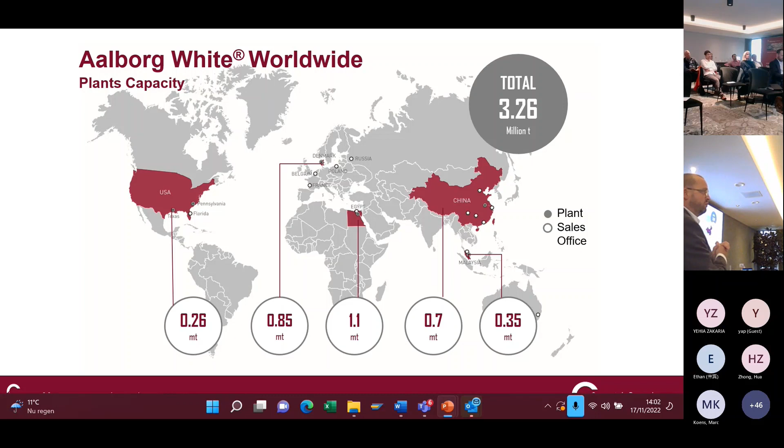And that is, of course, about the raw materials that are used. So first, a little explanation of who we are and what we do. Aalborg Portland, we have 5 cement plants all over the world, in the US, Denmark, Egypt, China and Malaysia, with a capacity of over 3 million tons of cement. 3 million tons of cement looks big, but if you compare it to grey cement production we are only peanuts - on a world scale we are, with these numbers, only 1% or less of total cement production worldwide. But for white cement, we are world leader in production and distribution.

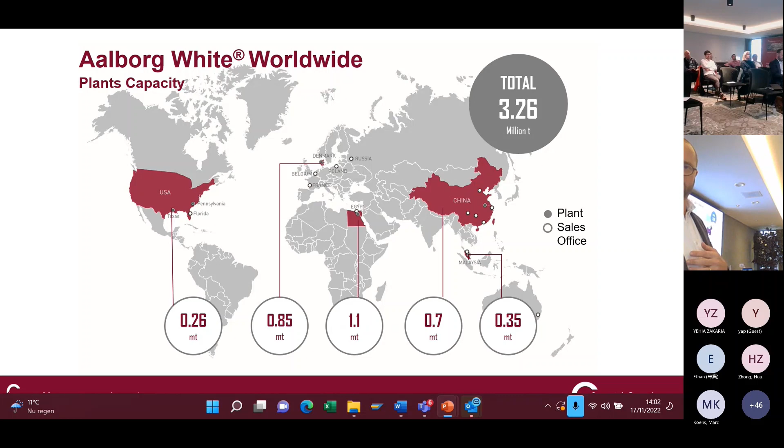We have a history of 125 years. This is in our plant in Denmark, in Aalborg, where we have this long history. But from Denmark we distribute our cement all over the world, present in more than 70 countries. Important for us is also not only to sell the product as white cement, but also to give technical support and customer support so customers can have value added to their activity. We try also to go into development for new applications, and this whole stream of UHPC in white products is helping us with that. Aalborg Portland is also part of an Italian group, Cementir Holding, which has operations in 17 countries and more than 3,000 employees.

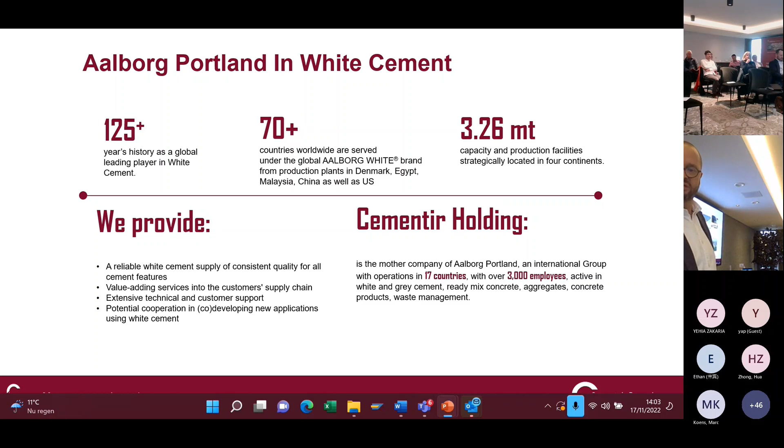Starting from white cement, we can give some segments of the application of white cement. Of course, white cement is always very important for aesthetical products - for facades, precast facade elements. It is also used in paving blocks and infrastructure works, and artificial stone, which is also more for cladding of facades. In Asia we have a lot of GRC, and in Europe we are also progressing in these techniques and projects - GRC standing for glass fiber reinforced concrete. And then UHPC, which is what we're talking about today, is precast elements with high strength. The dry mix mortars are for us also an important segment - all kinds of mortars, repair mortars, tile adhesives, skim coats are also based on white cement. Last but not least, for in-situ projects white cement is often used, like in these projects in Asia.

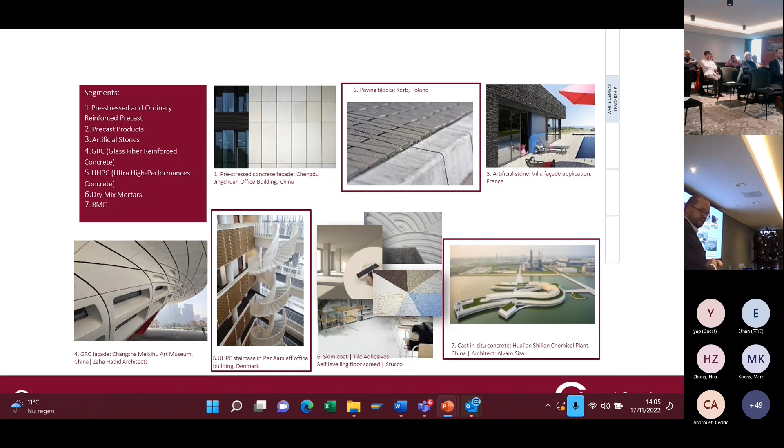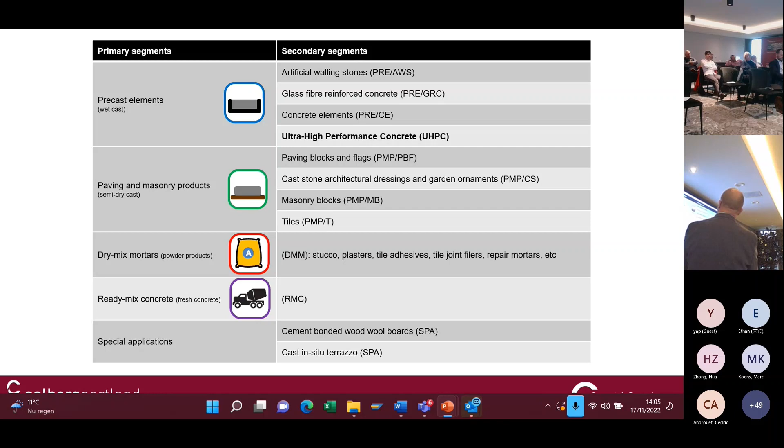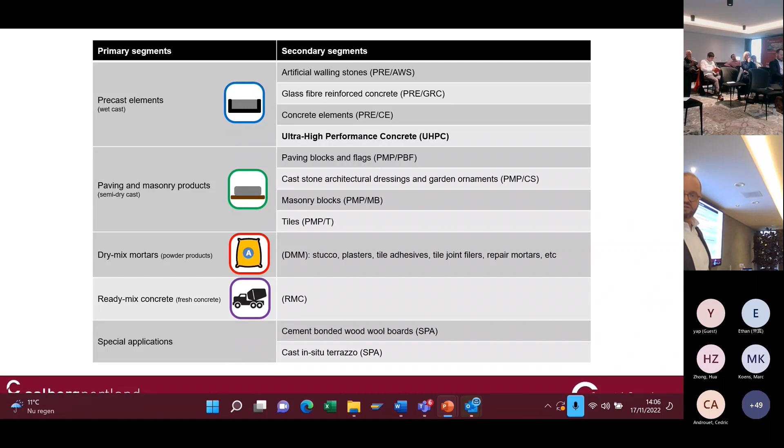So just to position where ultra high performance is situated in the whole concrete industry, we have the primary segments: precast, wet cast. We have paving and masonry products, which we call semi-dry cast, and then dry mix mortars, ready mix concrete, and special applications. Of course for ultra high performance we are talking about a high-end industrial product. It's important to have good conditions to guarantee the quality. So UHPC until today is, for 99%, made in precast conditions with high quality standards, also because of the aesthetical effects and the aesthetical result we want to achieve - it's in precast that most of this production is made.

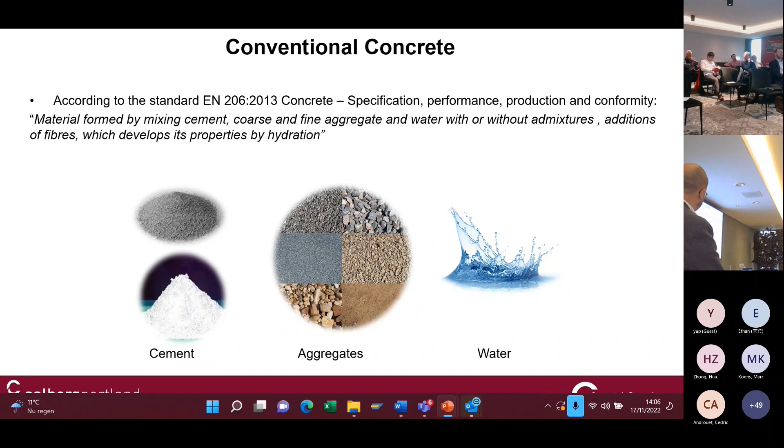Starting from conventional concrete, known by everybody - cement plus aggregates, sand and water - we can achieve different strength classes. The European standard only goes up to strength class C100/115, meaning 100 Newton per square millimeter for cylinder strength and 115 for cube strength.

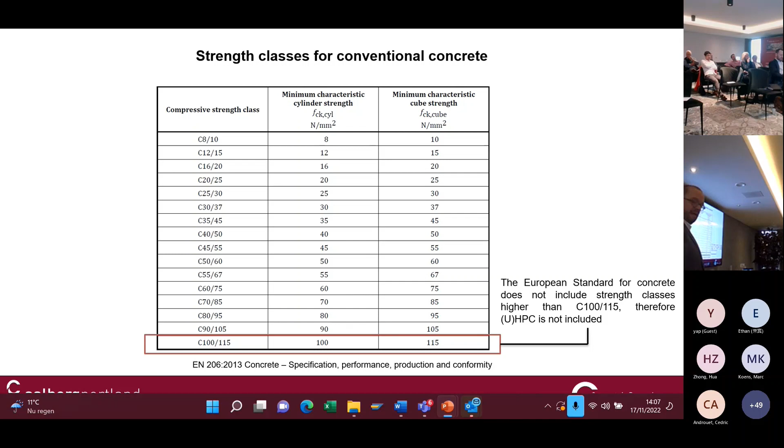This is a limit that has been passed since the development of high performance and ultra high performance concrete. The guidelines for the higher strength classes are still in evolution and still in negotiation.

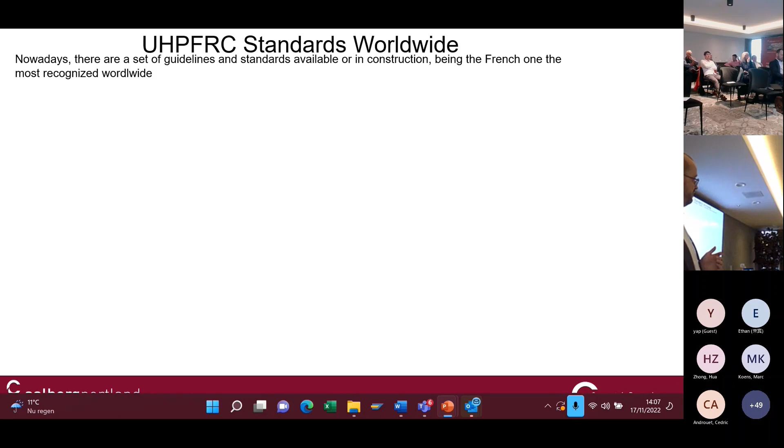In France there is already a very good guideline available, a standard where specifications about performance and production are already described. You can consult this document, which is the most recognized one worldwide.

In Germany there is still a guideline for UHPC in progress. In Switzerland we already have a good recommendation, as told by Peter. Switzerland is also very active in UHPC, but more in the field of overlays, road and bridge repairs. More recently in the US and China, a lot of new standards are being developed, also for GRC and UHPC.

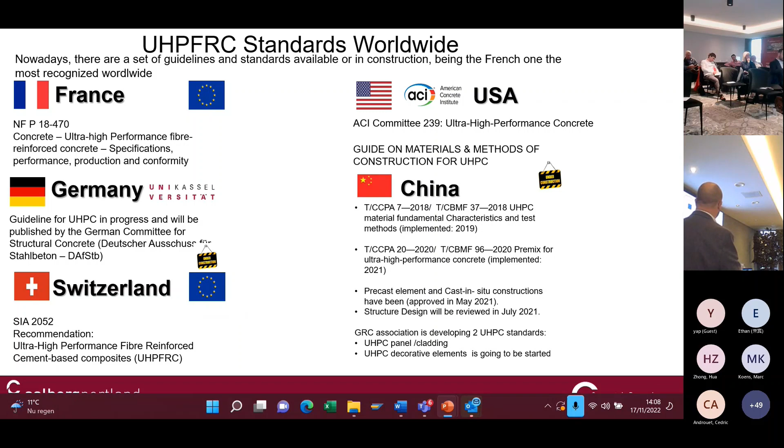I will not go too much into detail on these standards, but if you need more info there exists some literature, and we can help you find the right way through the standards.

To talk about UHPC, we start with traditional UHPC, because after that I would like to take the step to the new generation of UHPC - but first, the traditional UHPC as it exists today.

The important parameters are the water-binder ratio, very low, between 0.15 and 0.25. We're also talking about a high amount of silica fume, around 20% by weight of cement. These kinds of mixes are characterized by a high packing density.

This high packing density is important to achieve high compressive strengths between 110 and 150 MPa, even higher. Also high ductility and durability are important.

The microstructure is so dense that there's almost no way for external liquids or other products to penetrate this matrix, because it is very dense.

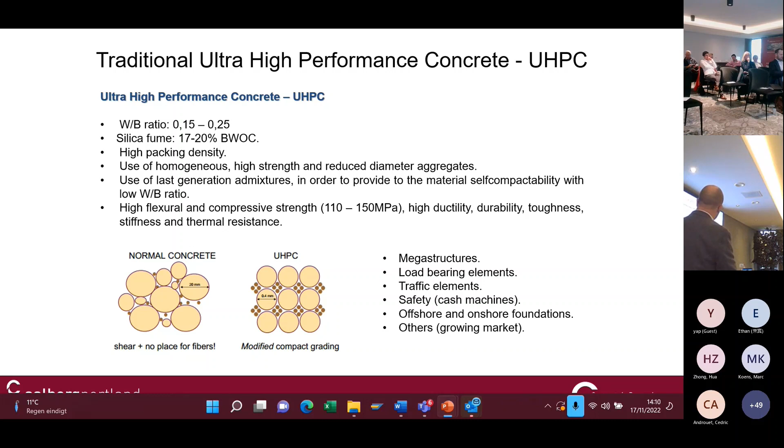So we're still in traditional UHPC - three components: the binder, which we have in very high contents, sometimes more than 50% in weight of the product, and in traditional binders superplasticizers are often included.

Next to the binder we have the aggregates - in most cases we're working with fine fractions between 0.5 and 2 millimeters. Then, depending on the application, fibers are added - steel fibers, glass fibers, PP or PVA fibers - meant to give the material residual post-cracking strength.

That means once you have a crack, or divided cracks, in the concrete, the fibers can provide residual post-cracking strength and take up even higher flexural strengths than the original concrete material.

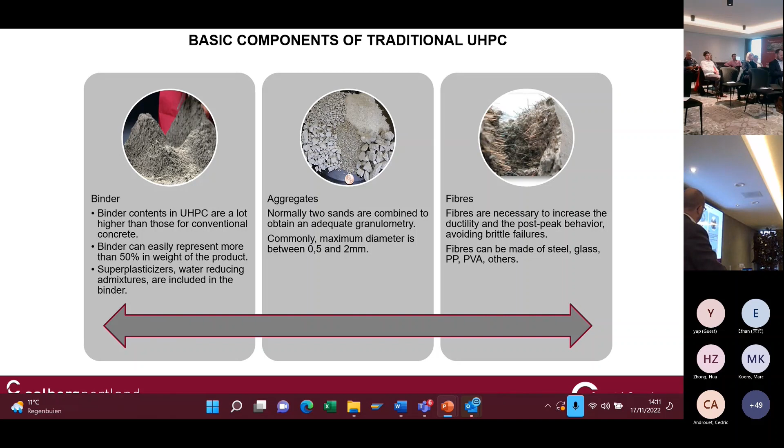Focusing now on the binder, one of the components: the binder has cement in it for the hydration reaction, and silica fume is often used as an ultrafine, reactive powder.

Sometimes there's also an addition of supplementary cementitious materials like fly ash and calcined clay, and other inert fillers are used like quartz flour and limestone. The superplasticizer is a polycarboxylate polymer included as a dry powder in this binder.

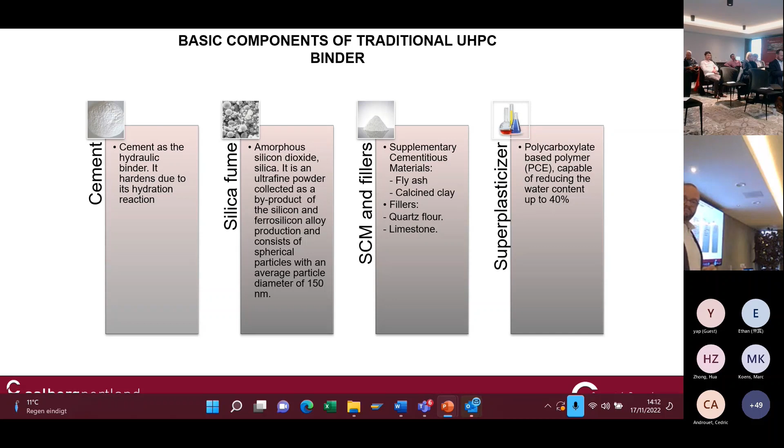What I want to explain now is our approach at Aalborg Portland: for durability reasons, we don't add silica fume anymore in our UHPC, because we've seen that silica fume sometimes has availability problems, and price-wise its volatility is often an issue.

We believe a solution to that can be to use metakaolin, which is a clay fraction, together with limestone. So we developed a new technology called the FutureCEM technology, based on replacing silica fume with metakaolin and limestone.

After a lot of research we've seen that this gives some benefits - we're still seeing further results, but the most important ones are reduced shrinkage, and also higher flexural strength performance.

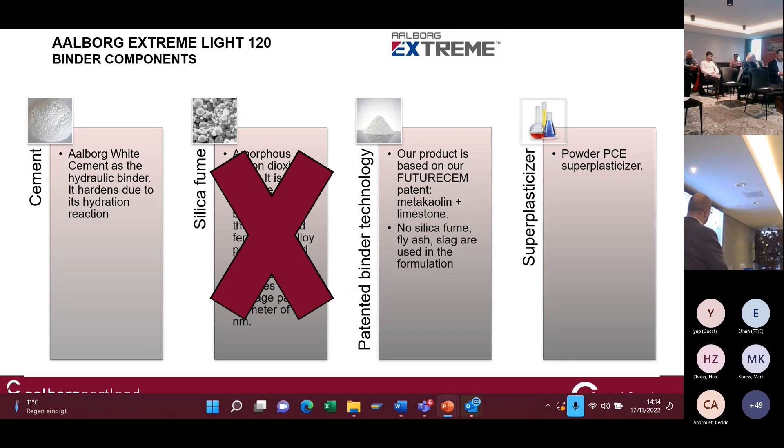So the technology that is behind this is the Futurecem technology. And this is based on 3 key values.

It's a green solution because we can reduce clinker content and reduce the CO2 emission through clinker replacement by 30%. And of course, it's also sustainable because the products we use are more available, more widely spread. And it's also innovative and validated.

Before sending out this technology, a lot of research has been done, and it has been validated by our Research and Quality Center in Aalborg. And this technology is also patented in Europe and in other countries.

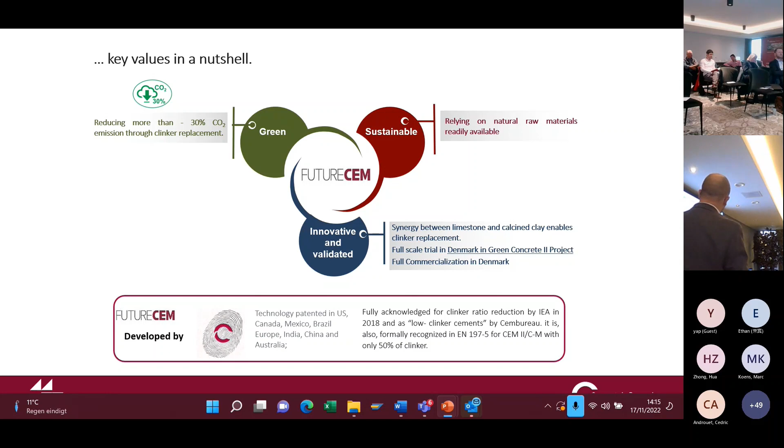And it's a part of the LC3 evolution in cement. The LC3 is a limestone calcined clay cement, which gives a good possibility for the clinker reduction.

So based on this technology, we have now developed until today 2 premix products that are available on the market, and also a binder product.

The first one is Aalborg Extreme Light 120. So it is based on white cement, of course, and it is an all-in solution. So a premix means you only have to add water and you can achieve a self-compacting concrete. It's even a shrinkage reduced mortar.

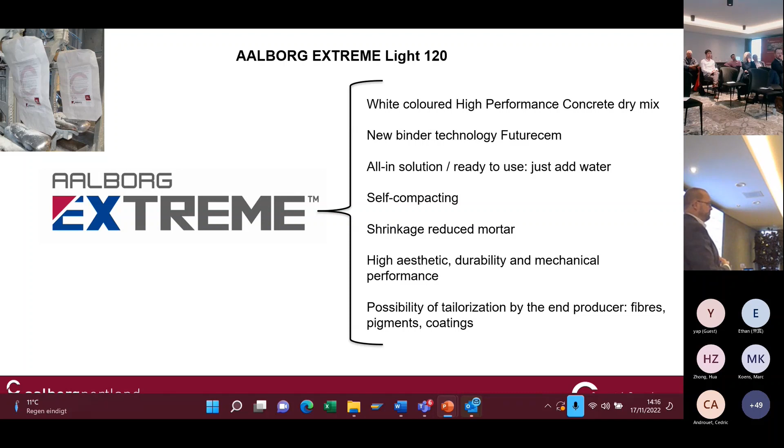And our strategy also with this product is we only provide the premix, and then we leave the choice to the customer for the tailorization, like what kind of fibers are needed for this application. Is it a structural or a decorative application? And of course also pigments and coatings. This is free to choose for the end customer.

So the principle is very easy to use. We have the Aalborg Extreme in bags of 25 kilo, or also available in big bags of 1 ton. The water dosage is something that is very fine-tuned, also in the lab. So let's say that the range of water dosage is very narrow, and you have to respect it to be sure that also the performances you want to achieve will be achieved.

And so the compressive strength for this product is minimum 120 MPa.

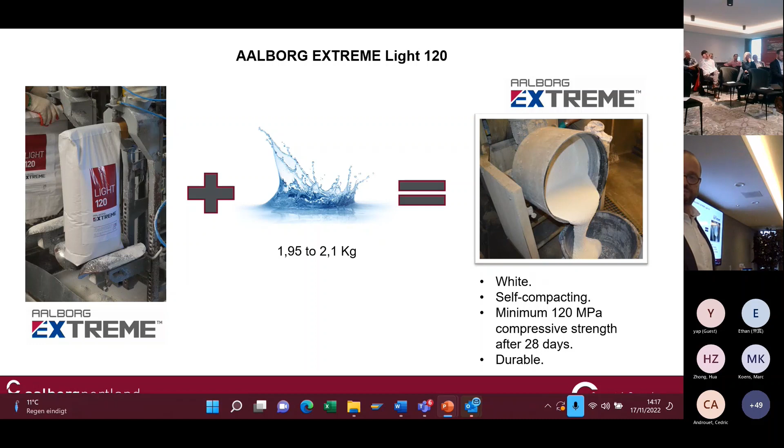And practically, it is also a strange material to mix. You can almost not compare it to a traditional concrete. The consistency is very different. That is because when you start with the dry powder and you start mixing with adding the water, you first see that you have nodules appearing, and these nodules are becoming from a small diameter, a larger diameter, and they come in after 3 minutes approximately in a clay phase, because the agglomeration of the big nodules becomes very hard to mix at that moment.

It is only 30 seconds that it is very hard for the mixer to go through this phase, and then after 5 to 10 minutes you have self-compacting consistency ready to cast.

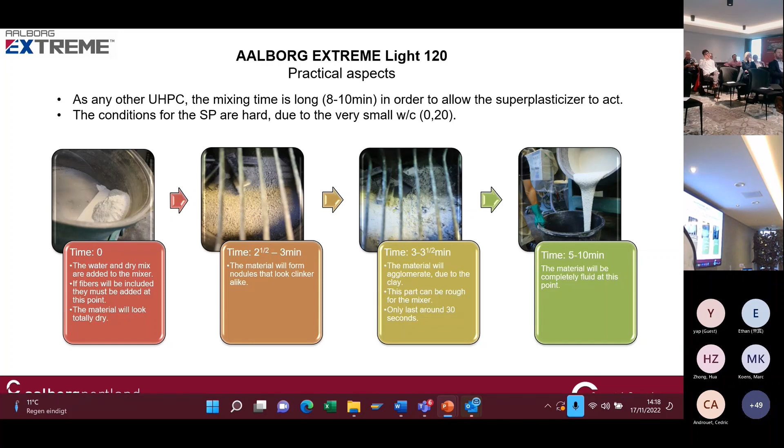So in fresh state, we can guarantee a flow of 900 millimeters, and also the flow retention of 45 minutes. It's in normal conditions, when normal temperatures between 15 and 25 degrees. Of course, if you go higher in temperature, the flow retention will be less. And also going lower is not so good for the flow. And also a very limited air content. And in Aalborg Extreme, we are working with an aggregate of maximum 3 millimeters.

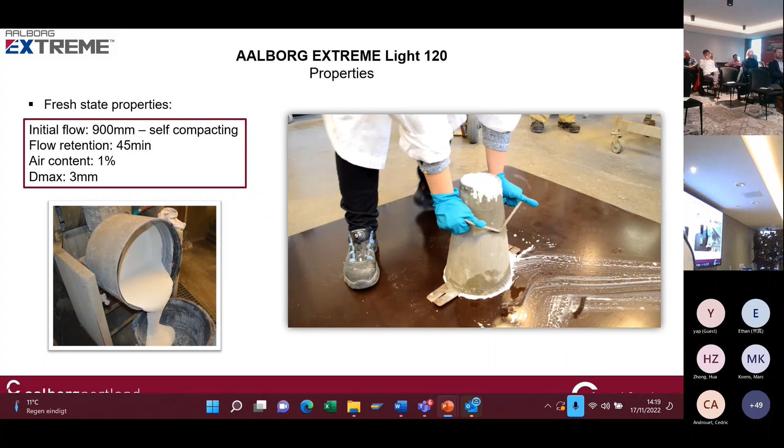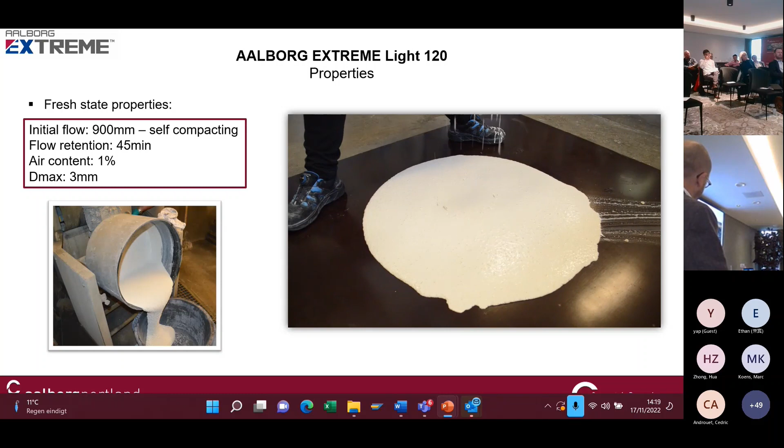Here you can see how it looks like with the Abrams cone. So very slowly flow, but achieving 900 millimeters.

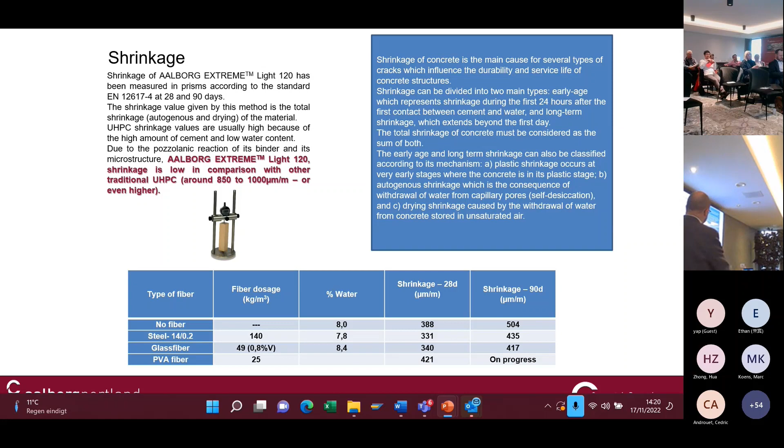So the main benefits of these products that are based on the Futurecem technology with inclusion of metakaolin is firstly the shrinkage. Shrinkage in UHPC - it has a lot of fine fractions, it's really a topic that you have to consider. And we have seen with working with metakaolin as fine addition that we can limit the shrinkage at 28 days at around 420 microns per meter, while at 90 days it's a little higher. But if you compare it to other UHPC mix designs with silica fume, it's a lot lower.

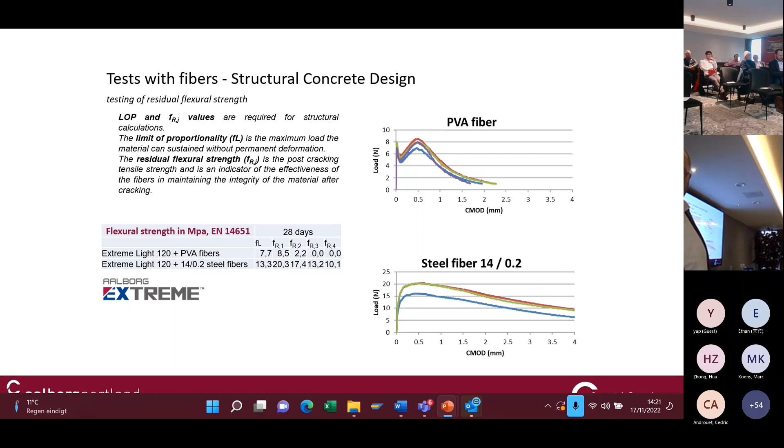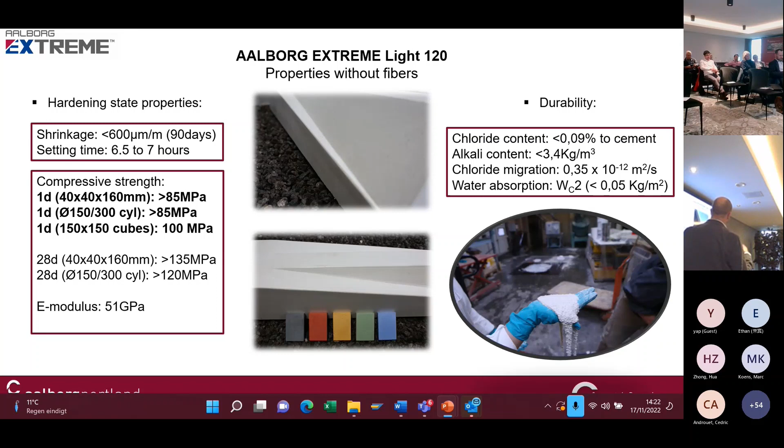And then in hardened state, okay, we can say that compressive strengths at 1 day are above 85 MPa, and at 28 days, depending on the kind of samples, above 120 or 135 MPa. And then durability-wise, we see that also chloride migration and water absorption is very limited.

So why choose UHPC? That is, of course, the main benefit is to reduce the weight. We have seen, for example, at the beginning we had traditional reinforced concrete, then the technology of the pre-stressed concrete. And now let's say that UHPC is giving the material the characteristics that it is becoming near to steel.

Thanks to the elasticity modulus, we can reduce 40 to 50% of material use. And that is, of course, if you can reduce the weight, that means also transportation costs and assembling costs, so that you can make more profit.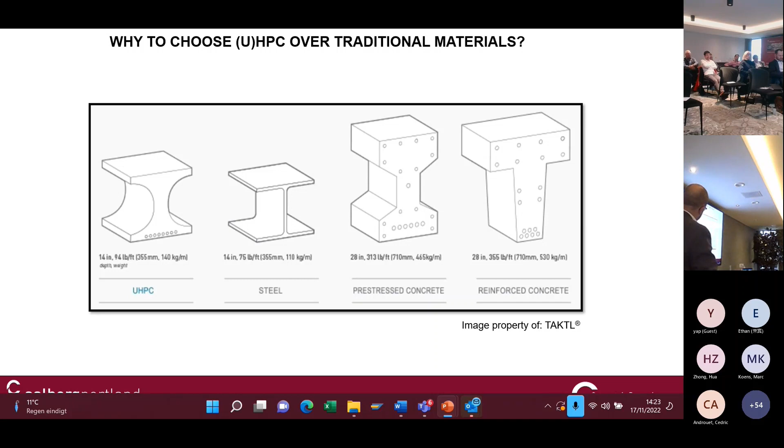Also in wall elements, traditionally you have to take into account the coverage of the reinforcement steel. In the first step, you can reduce the thickness of the panels, but the advantage in relation to traditional concrete is that the coverage of the reinforcement steel can be reduced to 10 to 15 millimeters, instead of 40 or 30 millimeters.

This makes slim elements possible. For balcony plates, for example, you only need 15 millimeters of coverage. So weight reduction of 40-50%. That also means less CO2 footprint.

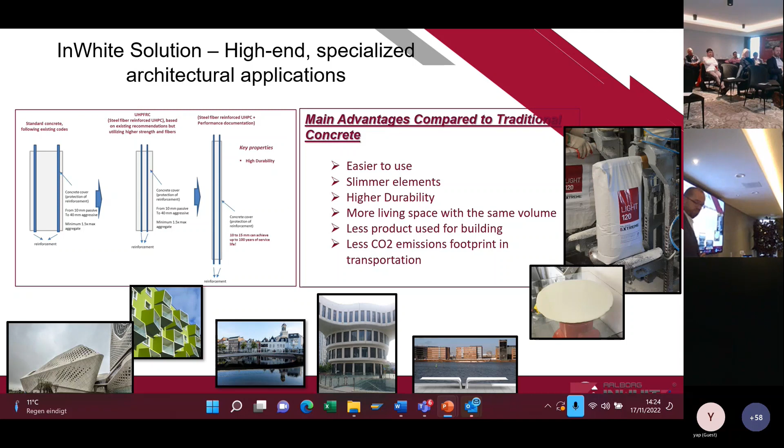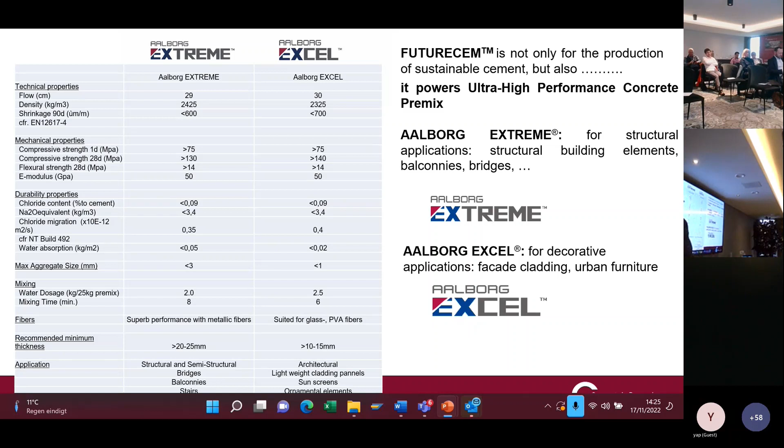So the first product we put into the market was Aalborg Extreme, but we made a second version because we wanted a matrix even more fine for decorative applications. There's a difference in aggregate size: for Aalborg Extreme, the T-max is 3mm, and for Aalborg EXCEL only maximum 1 millimeter. The flow is also a bit better for Aalborg EXCEL, making complex formworks possible.

The applications are also a bit different. Aalborg EXCEL is more in combination with PVA or PP fibers, for decorative applications like facade cladding, urban furniture, sunscreens. Aalborg Extreme is more for structural elements like balconies and bridges. That's the reason why we made this division between the two products.

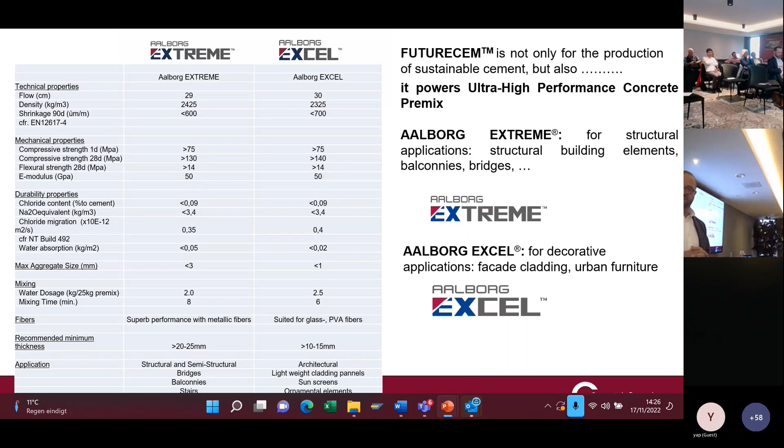So these two products are in fact the first step in our innovation plan for the coming years. It all started with the FUTURECEM - this is the base, the binder, the cement used for these kinds of products. Then Aalborg Extreme and EXCEL came onto the market.

We have a product in development at the moment called Aalborg Explore, which is for 3D printing. For new solutions launched this year, we launched Aalborg Inbind. And in the near future, Aalborg Recover will also come shortly.

Aalborg Inbind is in fact the binder used in Aalborg Extreme and EXCEL, but we want to launch it as a base product where customers can choose which sands to add, to work with local products too. I think it's an ecological benefit - people can use local products so they don't have to transport sand all over Europe. Secondly, the customer has more liberty to achieve what they need depending on the application.

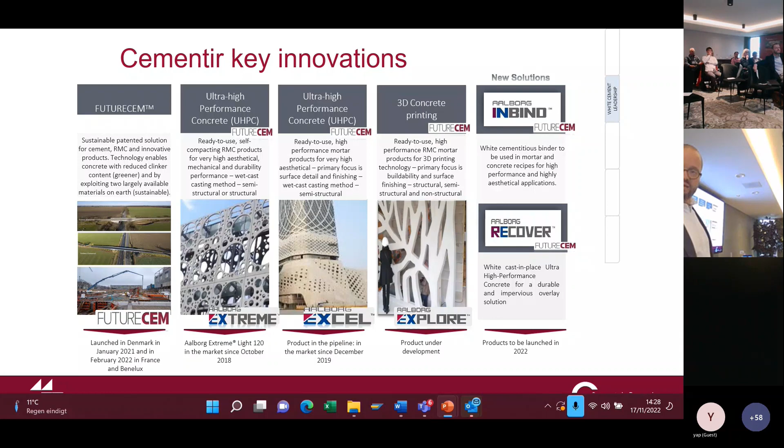So the last product we are now launching is this, named Inbind. It is also in the range of ultra high performance. It is customizable - you can choose your local aggregates and mixtures. Of course it's reliable because the quality control procedure is guaranteed and monitored in our research and quality center. And we give the customer a package of tests to help them make the right mix design they need, depending on the application and performance they need to achieve.

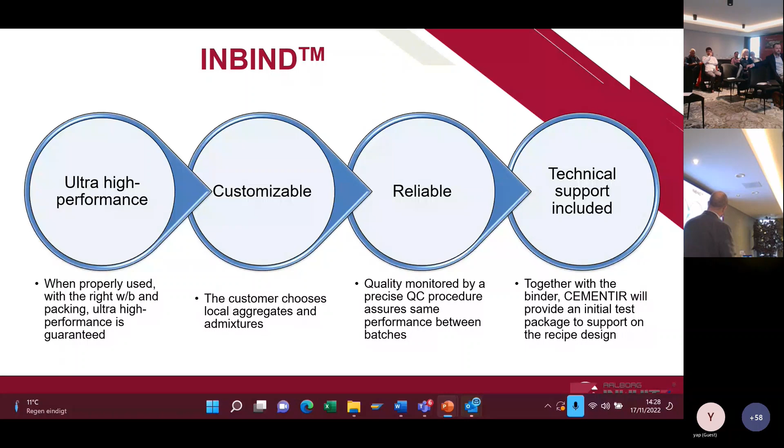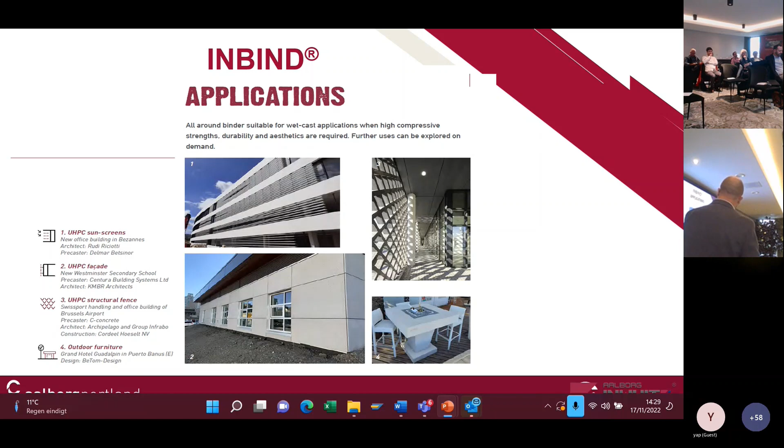Applications are also more or less the same as for Aalborg Extreme and Aalborg EXCEL, like sunscreen lamels, resile panels, and flat facade cladding or furniture.

Some more figures about compressive strength: we already achieved 75 MPa after 1 day, and up to 180 MPa after 28 days. And the flexural strength, we achieved above 20 MPa.

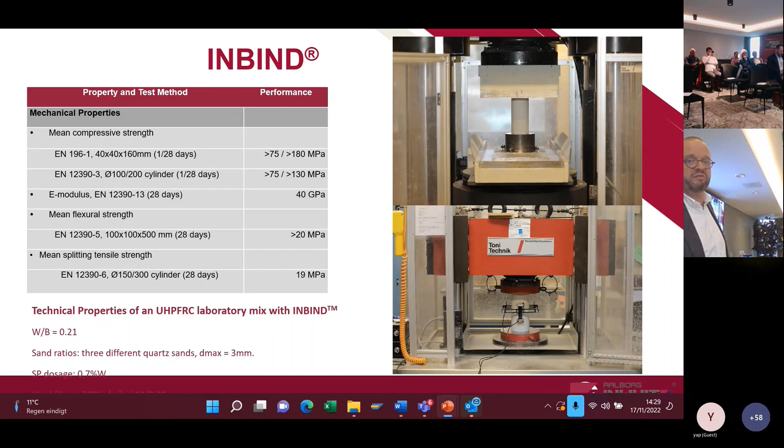And then I can already show you some projects. These are mostly projects based on our premix products. This one is based on Aalborg Extreme - it's an office building in Reims, France, made by a company called Delmar Betsinor, designed by the famous architect Rudy Ricciotti, who is the pioneer for UHPC and slim architectural design.

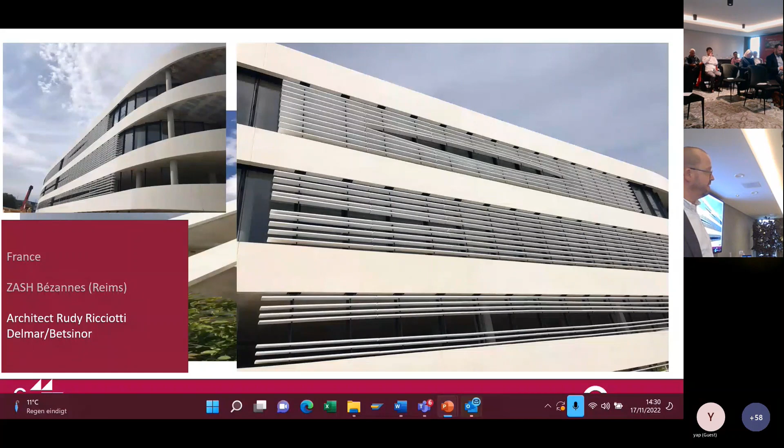There we made something like 6 kilometers of this kind of lamels, but also bended in more than one direction. So the formwork was not so easy.

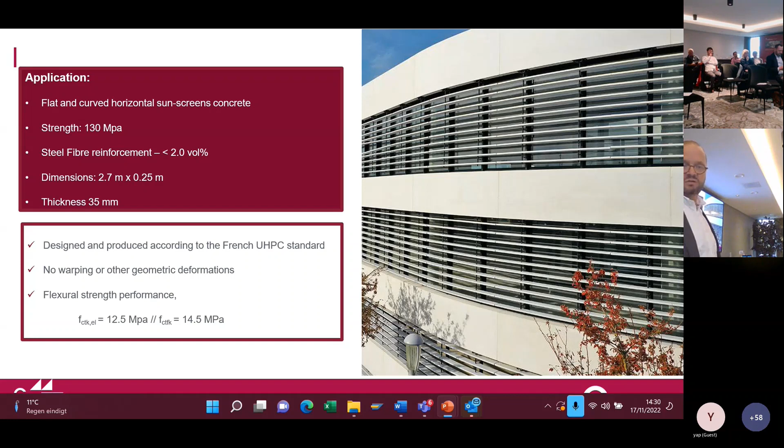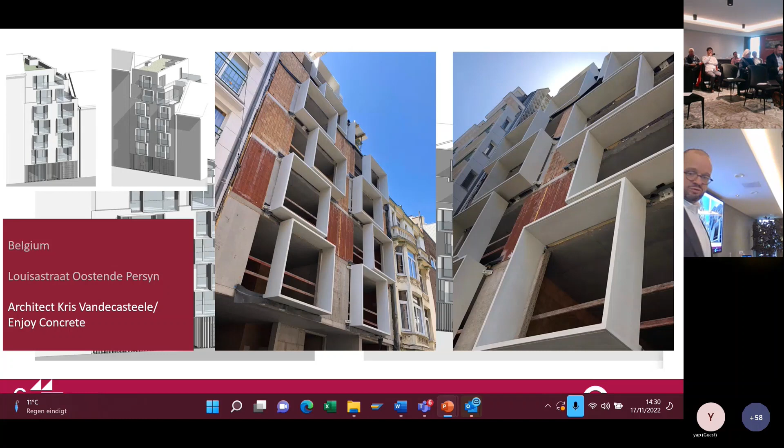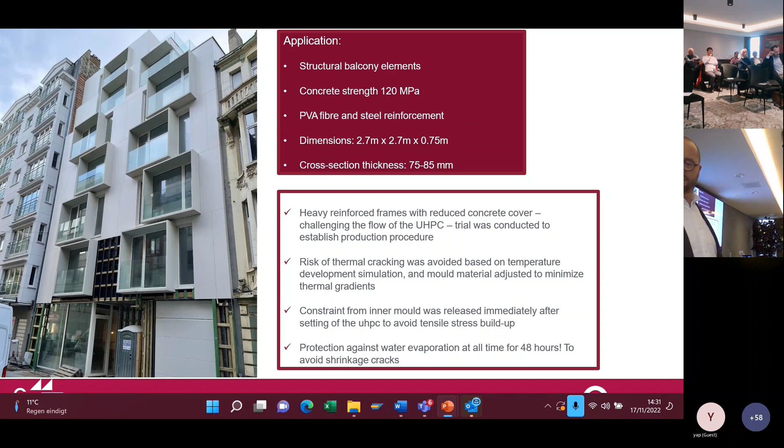This is a project of Enjoy Concrete for balcony frames, with a very slim design - only 75 millimeters thick, 85 millimeters at the top. These frames are made in one element, so formwork-wise and reinforcement-wise it wasn't easy, but we succeeded. And then instead of horizontal lamels, we also have vertical slim sunscreen lamels.

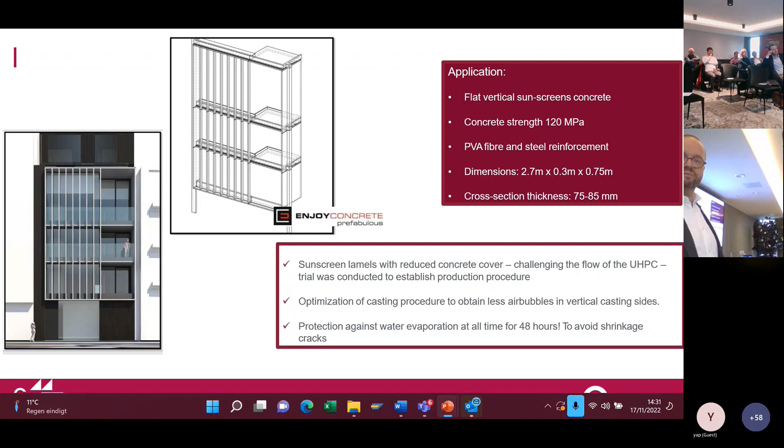This project is Swissport Zaventem, but there is a presentation later which will give more details about it from Cordeel C-Concrete.

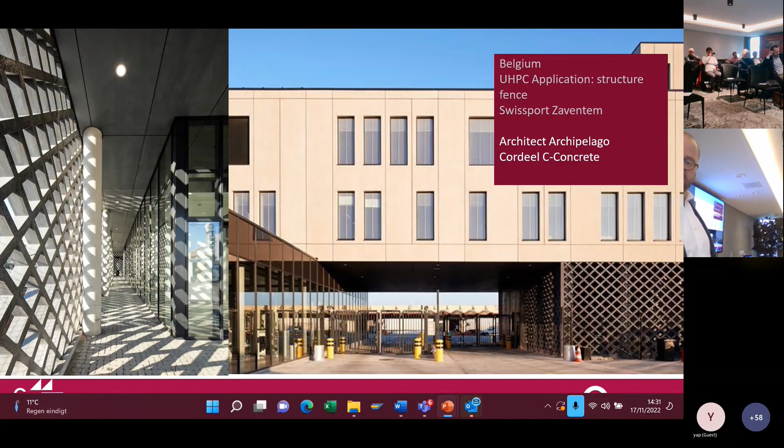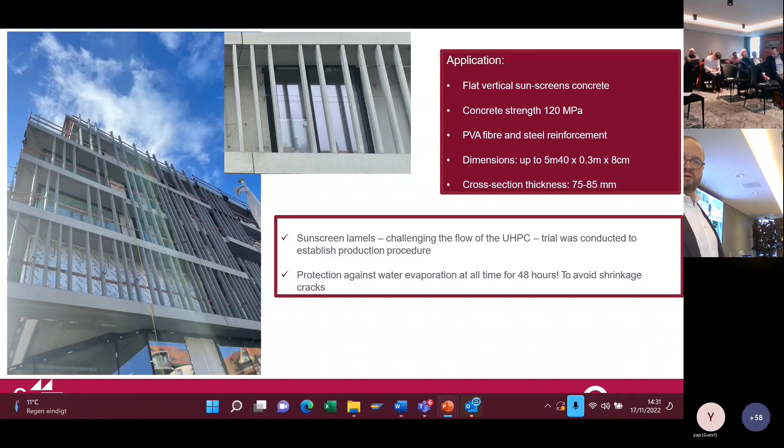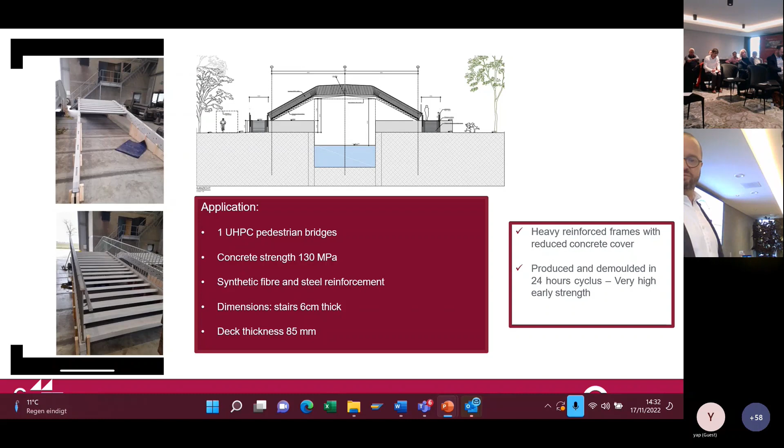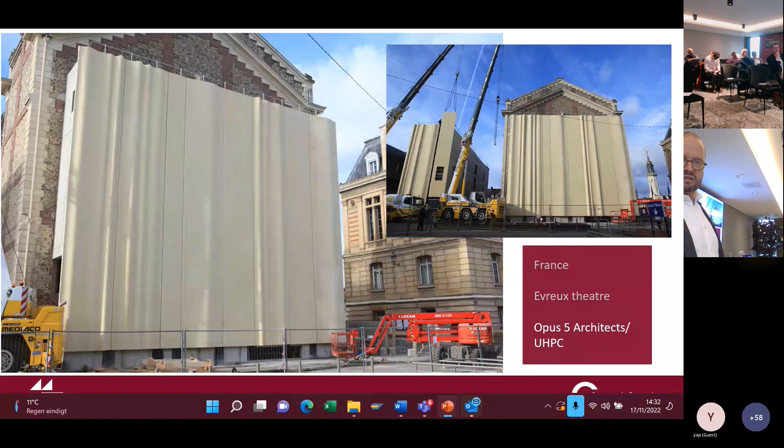This is a project in France. Panels for a facade, 13 meters by 2 meters, 8 centimeter thickness. This is a project in China with panels, facade cladding 1 meter 30 by 3 meter height, only 60 millimeters thick.

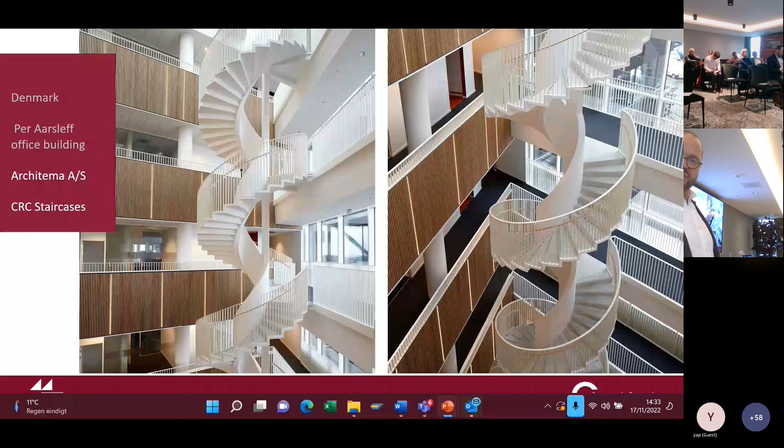And these are some projects from Hi-Con, which are made with CRC, compact reinforced composite. You can see the slim design, it is only 6 centimeters thickness on the top, and this can also be applied in balcony frames, balconies.

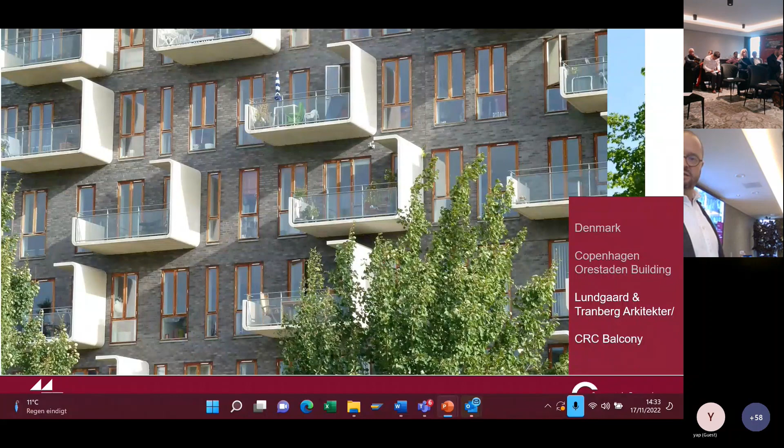And this project is also from Hi-Con. It was already shown by Peter, so to make larger spans for these kind of aesthetical bridges.

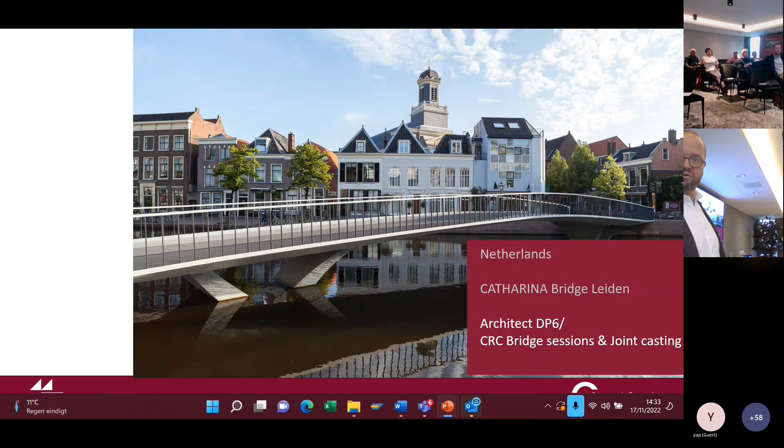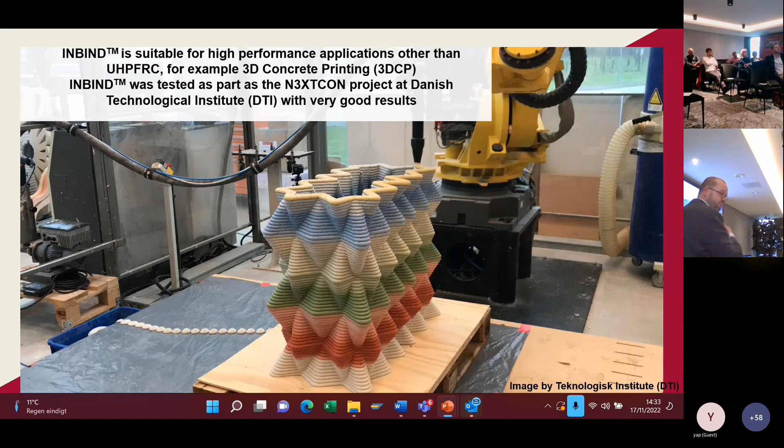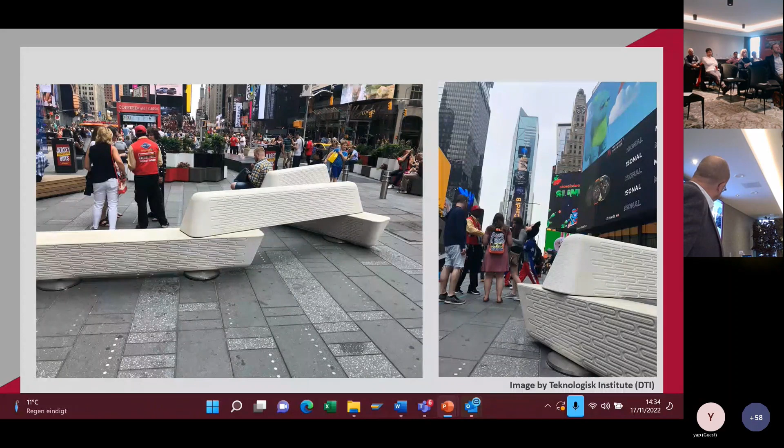I can say also that these pictures are about the development of 3D printing. So we work together with the Danish Technological Institute, and these are some results we could make. And these are some benches placed in Times Square in New York, also with 3D printed mortar.

So this is my story, let's say. I hope, application-wise, we can make an extension to make it more broad than until today. Hopefully we can have some inspiration, and if you have some questions, of course, you can reach us.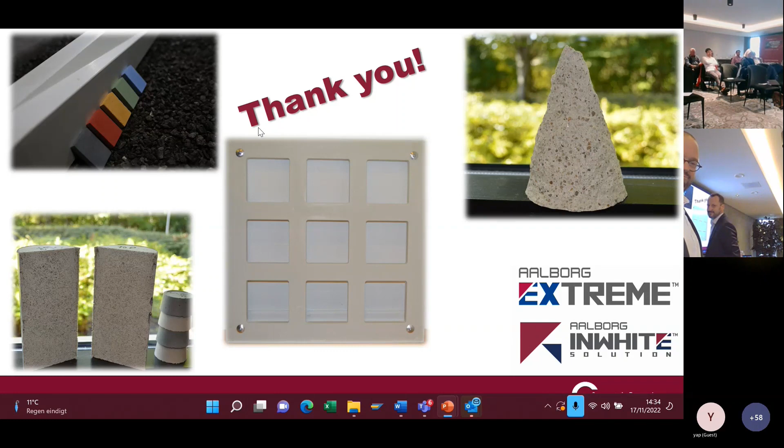Yes, there is a difference between plastic shrinkage and the early age shrinkage until 28 days. We consider in this case the figures we have are the autogenous shrinkage, and the plastic phase is not included in that.

Why not? It's not used in standards to combine or to accumulate it in the figures. I think the norm is mentioned. So the figures, the standards exist, and we used the measurement methods that are in the standards.

So that shows that there is something wrong with the standard, because it's the most important figure. I think autogenous shrinkage is also important, yes. And you have to measure it actually from the moment that you are casting, when you want to have a real accurate figure, especially at UHPC, because there you have the largest shrinkage in the first few hours.

So when you cast a mold, let it harden, bring it to the lab, and start to measure it, it's already wrong. I only know it's measured according to the standards, and then, of course, discussion can indeed be had about whether the standards should be changed.

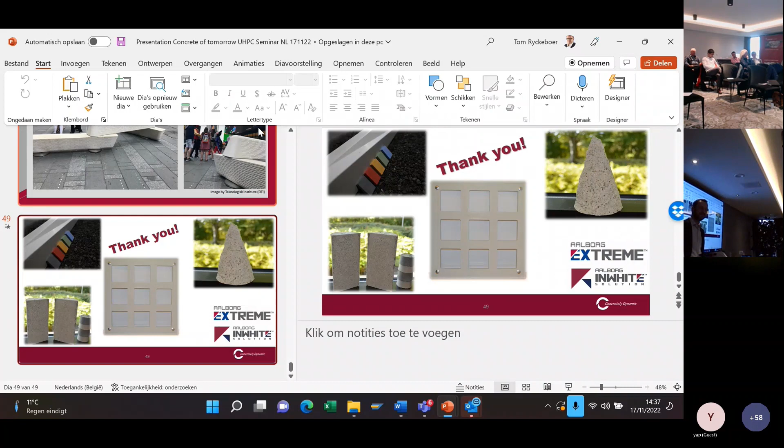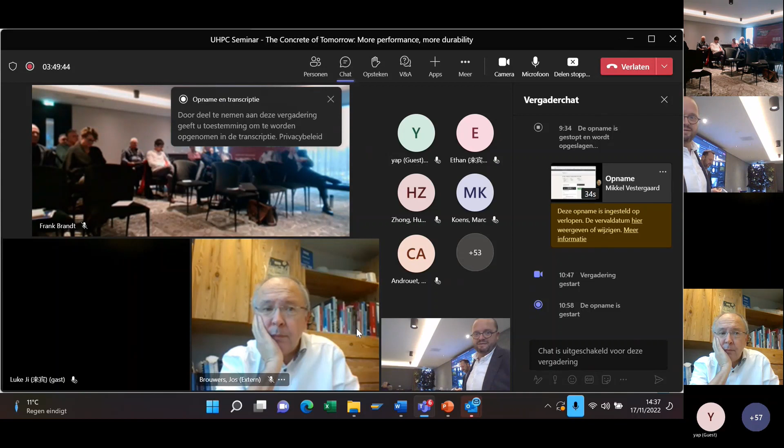It's a very difficult test. When you do it, you have to take really care that everything is done the right way, otherwise you're measuring something you don't want to measure. So you have to seal it, no evaporation at all is allowed from what you cast, so you need aluminum foil and things like this, otherwise you are measuring wrong.

Good, I think. Any more questions? Just one about hydration, so temperature rising due to hydration, can you elaborate a bit about it? Yes, of course, because of the high cement dosage and the low water binder ratios, you have a higher rise of temperature than in traditional concrete.

And also the strength development in the first 3 days is already at almost the maximum, it's going very fast, and also the hydration temperature is going higher. But as you work mostly with more slim elements, the temperature will rise a little higher maybe than traditional concrete, 50-60 degrees, but that depends also on the formwork.

Good, then one more hint, Tom, from the online audience: in Canada, it seems they have developed annexes for UHPC to the standards, so maybe for completeness we should add it to our slide with the standards always. Interesting. All right, good.